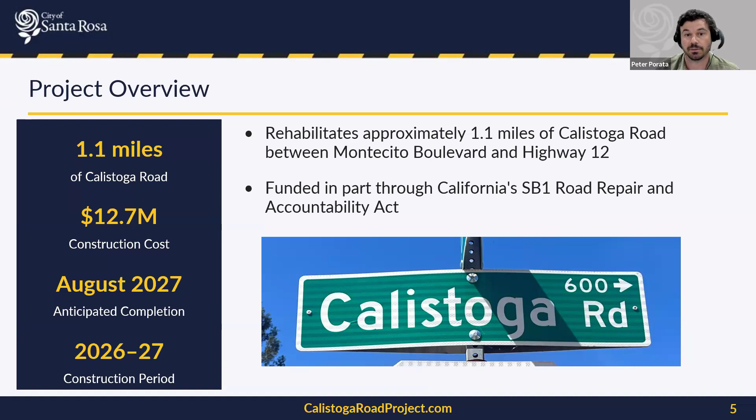The construction cost for this project is estimated at $12.7 million and is funded in part through California's SB1 Road Repair and Accountability Act, which was created to support local road rehabilitation projects like this one.

As I mentioned, this project will improve Calistoga Road from Montecito Boulevard to Highway 12, with a focus on making the corridor safer and more functional for everyone, drivers, cyclists, and pedestrians. To do this, the project will use a method called full depth reclamation, or FDR, for the vehicle travel lanes and center lane. This method of paving is a cost-effective and sustainable way to rebuild a deteriorating road from the ground up. For the parking and bike lanes, crews will use a mill and fill approach, which focuses on milling or removing the top few inches of pavement, then filling or resurfacing the top layer with new pavement.

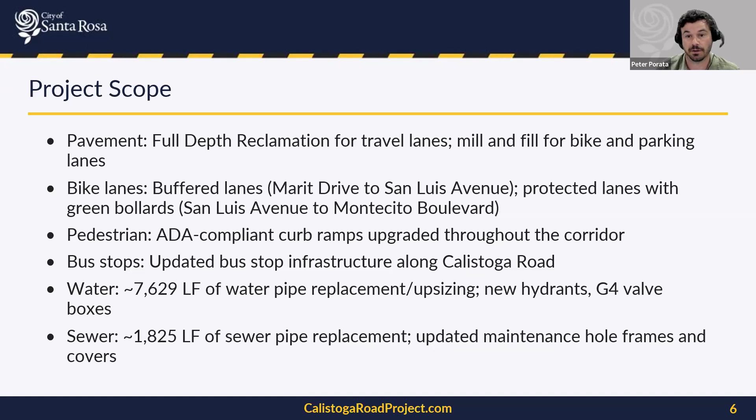The project also includes upgrades to bike lanes. From Marit Drive to San Luis Avenue, there will be buffered bike lanes, and from San Luis Avenue to Montecito Boulevard, the buffered bike lanes will be separated with bollards. Pedestrian curb ramps along the corridor will be upgraded to meet current ADA standards. We'll also be improving bus stop infrastructure along Calistoga Road. And in addition to the roadway work, this project includes significant water and sewer system improvements along the corridor.

With that, I'll now hand it over to Mike Janet, who will walk you through the construction phases and activities in more detail.

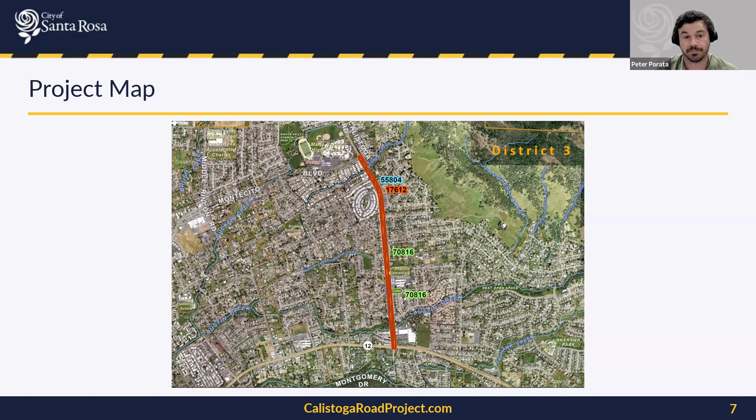From here, crews will move into underground utility work, which includes water pipe replacement and sewer pipe improvements that Peter described. Once underground work is complete in a given segment, we'll transition to pedestrian curb ramp replacements and curb and gutter work.

As Peter mentioned, FDR will be used on the main travel lanes and the center turn lane, the sections of Calistoga Road that have experienced the most significant pavement deterioration. Rather than paving over the failed surface, FDR grinds up the damaged asphalt along with a portion of the underlying base material, blends it into a strong uniform base layer, regrades and compacts the surface, and then tops it with new asphalt. Because we're recycling and reusing the existing material on site, there is less hauling in and out. This helps keep costs down and reduces the environmental impact of the project. It also addresses the root cause of pavement failure, which means a longer lasting road for the community.

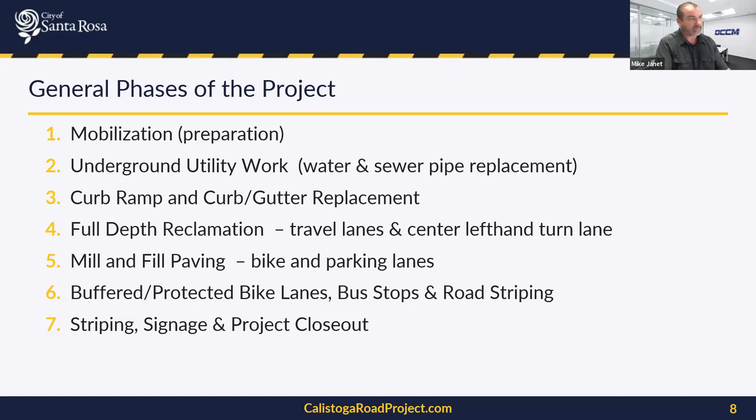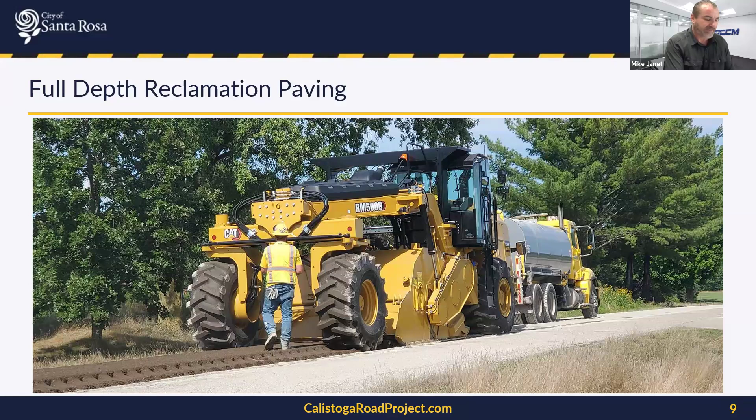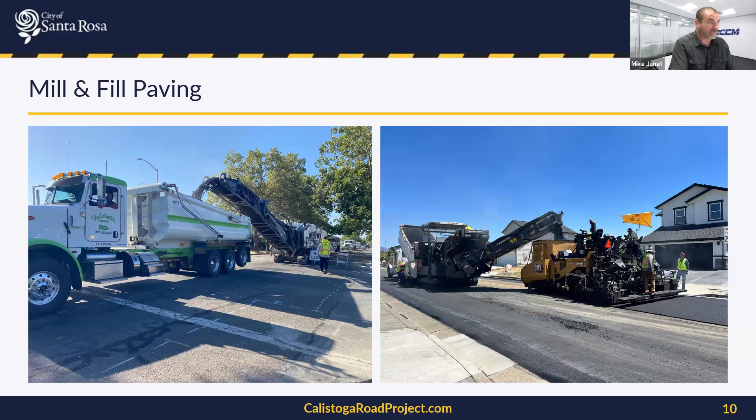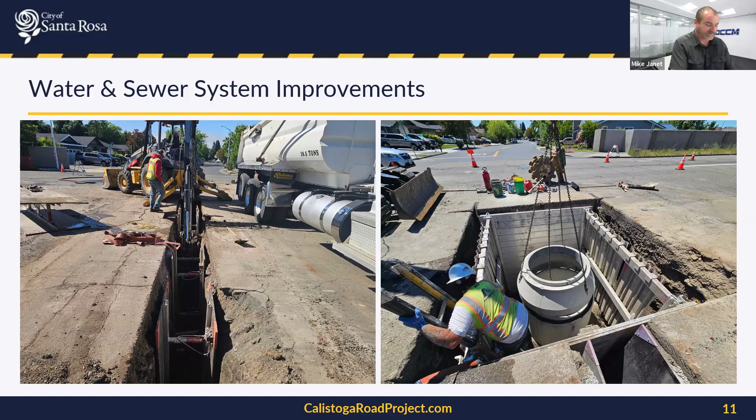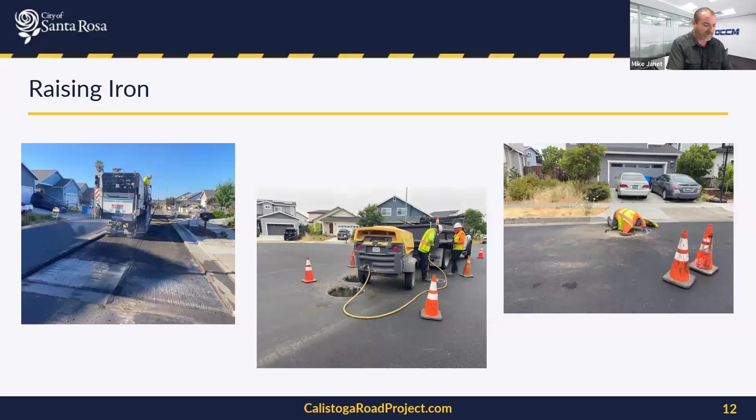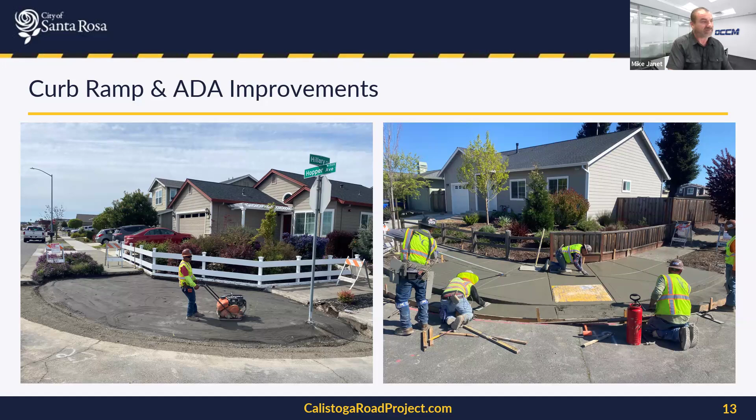The final phase includes installation of buffered and protected bike lanes, road striping, signage, and any remaining bus stop improvements. This is also when the green painted bollard protected lanes between San Luis Avenue and Montecito Boulevard will be installed.

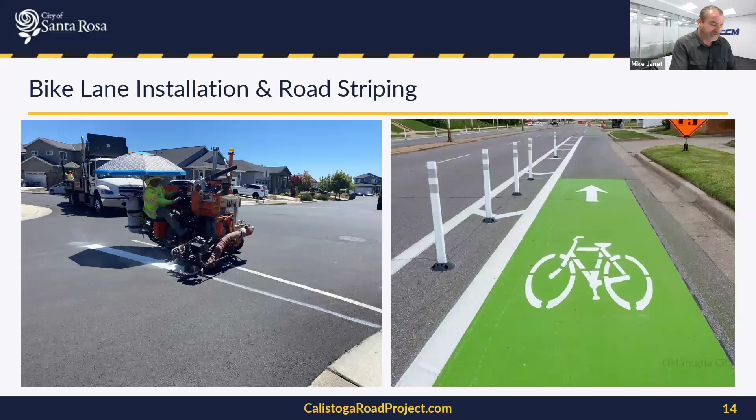Construction began June 8th with an estimated completion date of August 2027, which gives us approximately 320 working days to complete the project. Work will generally occur Monday through Friday, with holidays observed. Typical working hours are 7 a.m. to 5:30 p.m. During those hours, traffic control measures and lane closures may be in effect.

There may be situations where lane closures extend beyond 5:30 depending on weather conditions and where we are at with the paving operation. When this happens, we'll do our best to provide advance notice through our weekly newsletter and our project website. The website address is provided at the bottom of each slide on this presentation and will be provided on the slide at the end of the presentation. Our goal is always to minimize disruptions while maintaining a safe and efficient work zone.

I want to start by emphasizing that emergency access and egress will be maintained at all times throughout the project. We are coordinating with emergency services to ensure that they have full access through the project area every day. There will be temporary lane and road closures as construction moves throughout different segments of the corridor. We will provide advance notice of these closures through weekly email updates, the project website, and ongoing site signage.

Street parking will be restricted in active work zones. No parking signs will be posted at least 72 hours in advance to give residents and visitors time to make other arrangements. Our goal is to keep disruptions as predictable and manageable as possible.

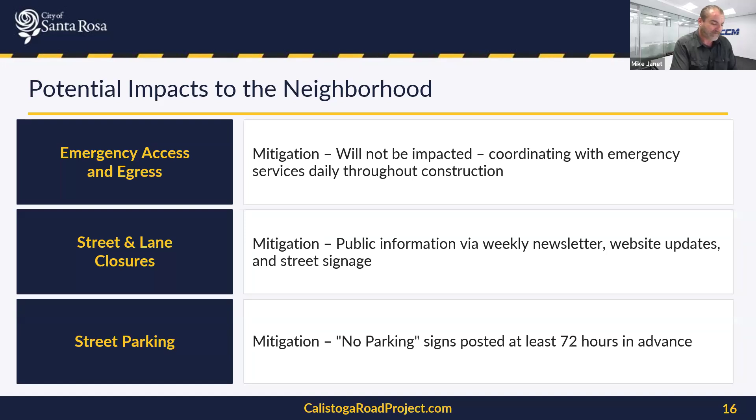For activities such as deliveries, trash service, and mail, we will coordinate closely with the service providers to maintain regular service throughout the construction. Crews will also perform regular street sweeping to keep the area clean and minimize dust and gravel impacts on the surrounding neighborhood.

Access to driveways and adjacent properties will be maintained throughout the project. There may be brief delays when work is occurring directly in front of a property or an intersection. Traffic control, detours, and flaggers will be in place as needed to guide you safely through the work area. We ask that everybody please drive with care in and around the work zone.

We also recommend signing up for our weekly email updates so that you always know what to expect in your area. Instructions for signing up will be provided on the next slide.

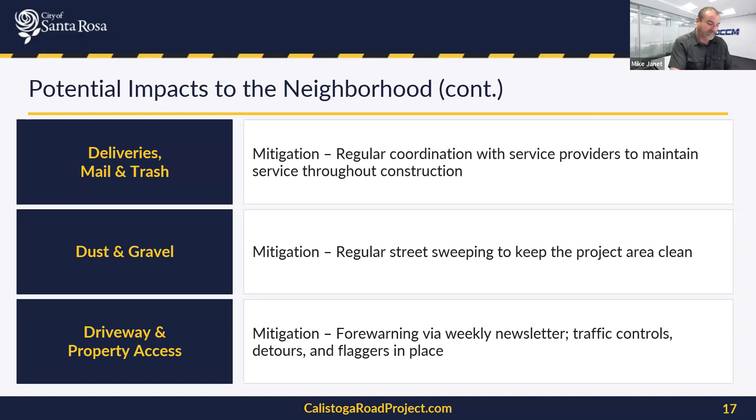If you have any concerns or encounter any issues during construction, please don't hesitate to reach out. You can contact the project team by email at info@calistogaroadproject.com or visit the project website at calistogaroadproject.com.

You can sign up for the weekly construction update newsletter on the project website or by scanning the QR code on your screen. Additionally, you can reach out to our project team for more information by calling the project information line at 707-387-4031. I'll now turn it back to Steve.